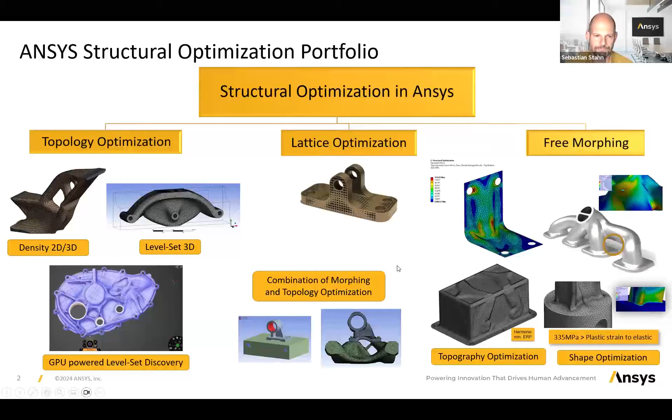We need several workflows for that. One is the design validation. Then we have the chain of optimizations where we're using different kinds of methods to get the best results. The most important and biggest pain point is STL to CAD solid parts.

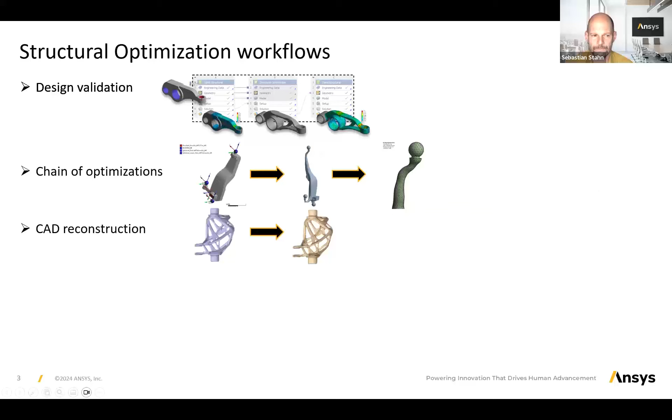And we need to check if we can really manufacture it. 3D printing is quite expensive, and we have a simulation suite for that, where we can check the positioning as well as the support structures to have the right printing time. Also, this kind of compensation of distorted geometries if needed.

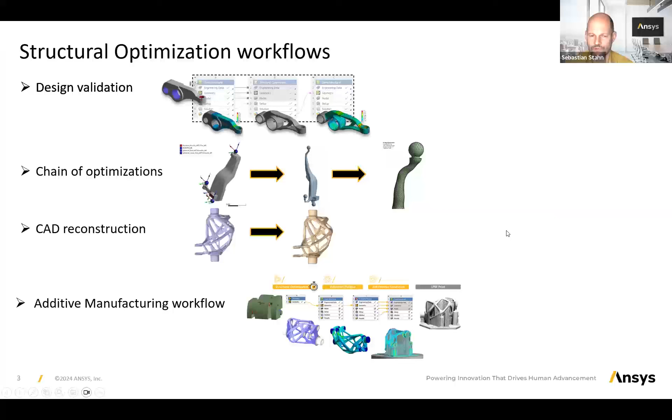Let's have a look at the first one. So this is how we are presenting our workflows. We have the structural analysis at the one part. Then this is feeding our topology, or let's name it structural optimization. You have the free choice, of course, what you want to use. So here we have topology optimization. And finally, we have design validation, where we check if all requirements are met.

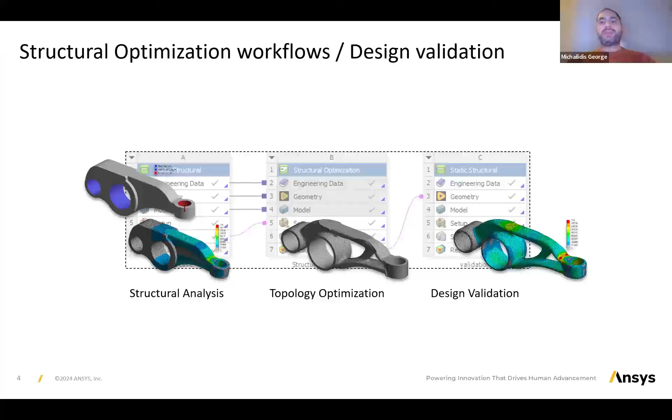Now, one may ask, why should I validate a design, since topology optimization performs an analysis at each iteration? First, let's mention that using density methods, it is inevitable that your design will contain some intermediate densities, since implementing projection methods based on some continuation approach that is frequently presented in literature is prohibitive in terms of time for industrials. Exporting a shape based on a density threshold is expected to have some impact on the values of the criteria serving either as objectives or as constraints.

This effect is significantly reduced, of course, using the level set method. However, even in this case, since a fixed mesh is used and combined with some sort of ersatz material approach for the exterior part of the shape, some criteria, such as the stress, for example, may be computed with reduced precision.

As you can imagine, a key ingredient for the success of this step is the smoothness of the optimized shape. The smoother the shape, the easier it is to reconstruct the mesh. However, smoothness introduces new challenges related, for example, to the rate of convergence, to the geometric details that finally appear in the optimized structure. For example, it's possible that the customer expects to see some thin ribs. And finally, there is a compromise to reach based mainly on the customer's experience.

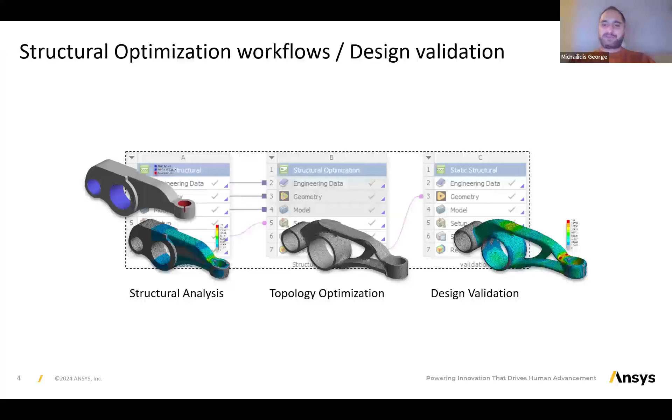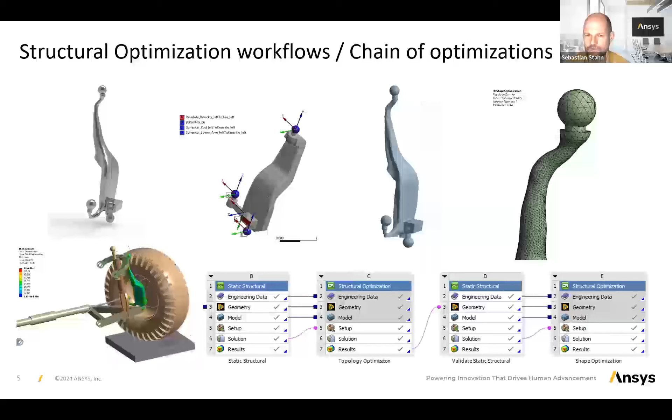And here the big question is: is it really working in a way it should? So in the next step, we're looking then at high loaded parts with a fatigue analysis, for instance, and this is then morphed with the free morphing technology to get a higher lifetime at the end. And so we can improve or reduce the stress by 43%.

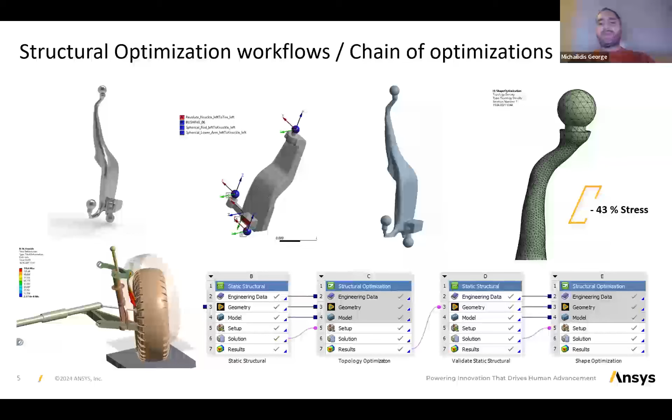Now, beyond the aforementioned challenges concerning the mesh reconstruction, we need to highlight an additional difficulty for this step. This is that with the exception of the level set method, which is of geometric nature, shape optimization uses different variational methods than density-based optimization. In order to make this workflow work, you need to cover a comparable range of criteria for both methods, which is quite challenging.

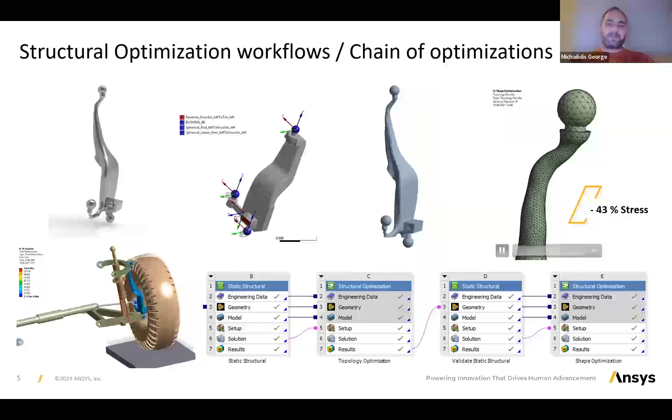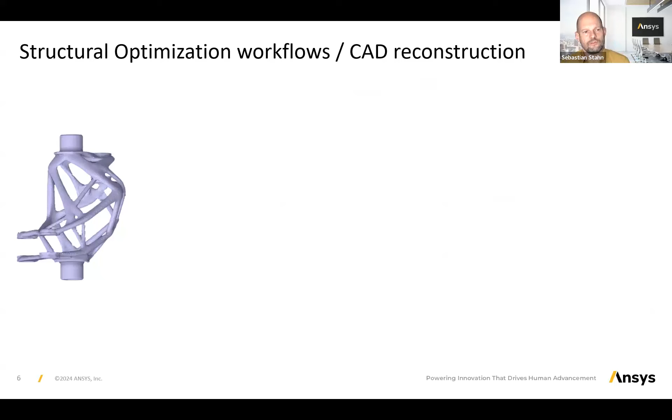Now comes the biggest pain point, I would say, for the industry. Imagine getting such a part back to CAD. This is really taking hours, sometimes in the past at least. So we have another concept: a tool which can create with one click this kind of part back into NURBS surfaces as a solid part.

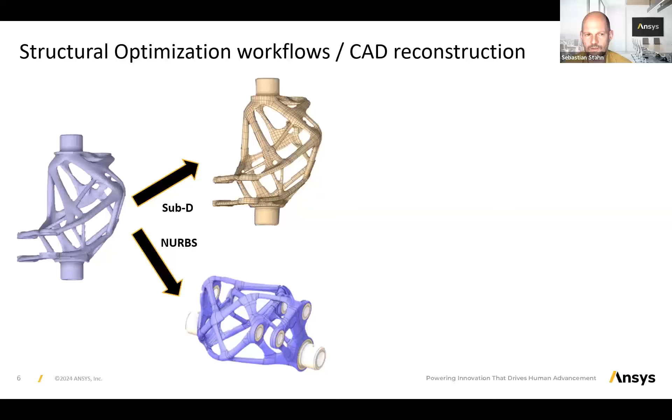And as we know that sometimes we need to change it a bit, we introduced the so-called subdivision modeling, where we are creating patches also with an automatic routine. And those patches we can then manipulate afterwards. We can add things. The boundaries are coming clear across. We can move on all kinds of surfaces to improve or to change something.

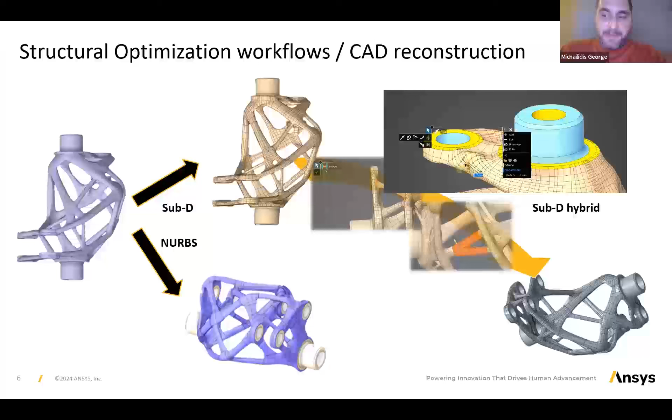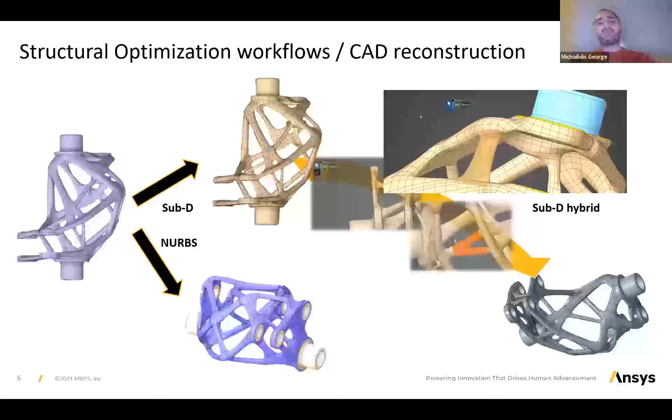Or even, if you can see it here, if there's some kind of a bridge needed for the post-processing, we can just add it. And that's it, that's the magic. And then finally, we can convert it back to CAD. Now, achieving robustness and precision in this process is also a difficult task that requires collaboration between optimization and CAD experts. In vague terms, we could say that bad geometry would require deviating significantly from the optimized boundary in order to create a proper CAD design, which can lead possibly to significant deviations in terms of performance.

Yeah, so let's have a look at the additive manufacturing workflow. As mentioned, it's important to have a simulation up front of the printing because it's expensive. And we need to look for orientations, strategies, scan strategies, support strategies, you name it. So we have everything connected and internally here for us, for the customers.

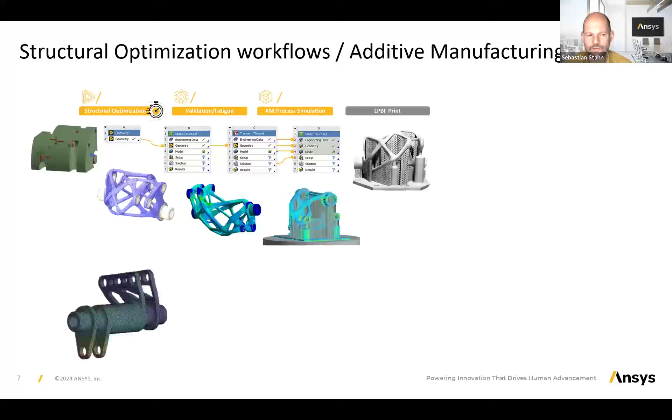And to give you an idea what was the challenge here, we faced that this kind of part, what we can see here, it's a really finally optimized part with milling. And the requirements were that this part weighs around 200 grams, should be even optimized even more. And then we get it down to 127 grams in titanium with our technology.

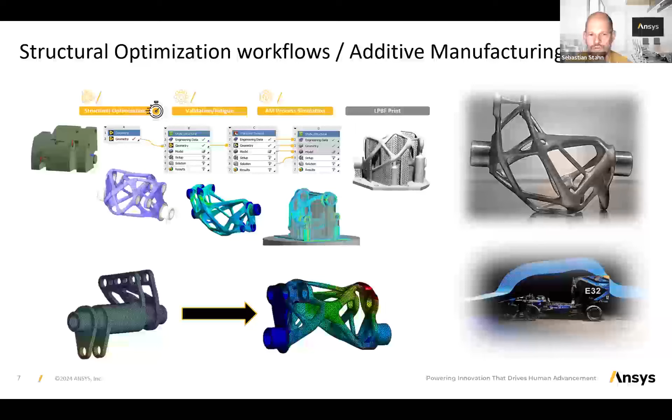We also have sponsors for that, which helps students print those parts as a kind of sponsoring package so that they can really take it and use it in their competition.

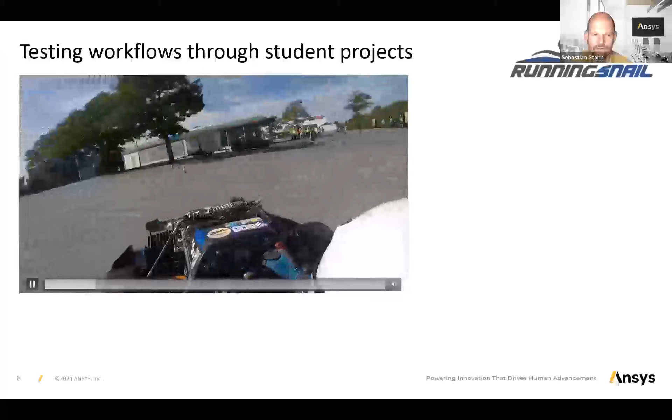And here you see it in action. They put it on the top left part, installed it, tested it, and it was also run in their racing series.

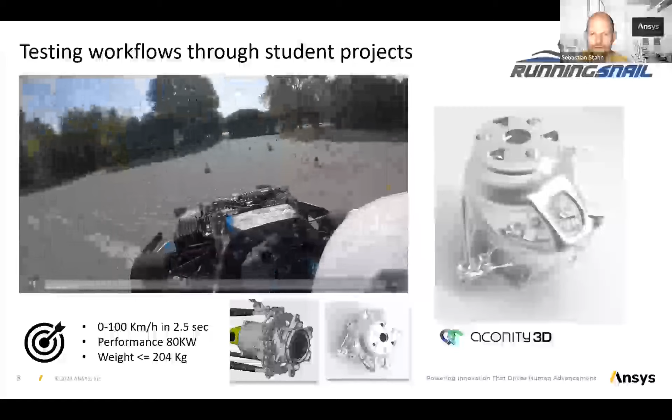Another part you can see: their electric motor is held by the part, along with the tire and the brakes. We did it also with the same approach of discovery at the end and getting it back to CAD.

The requirements were to have a car which is really lightweight, so 204 kilograms. I think they ended up at 180, if I got it right. I talked to them. The performance is always the same, and the speed is 2.5 seconds from 0 to 100 km/h - that's 0 to 60 mph in America.

So this completes a general overview of how structural optimization is implemented in Ansys and some general challenges related to the need for complete and efficient workflows.

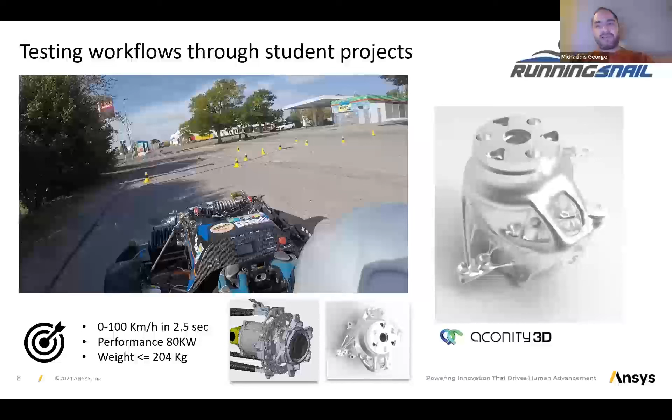Now let's focus on some functionalities that have proven to be important for industrials through our experience.

Let's start with manufacturing constraints, which, as you can imagine, is a crucial component for real-life applications of structural optimization. Beyond standard constraints frequently met in literature, such as casting direction constraints, overhang elimination, and feature size constraints that we provide to the user, there are also manufacturing constraints that derive from the functionality of the part.

Consider, for example, this clutch design, fixed at some regions shown in blue, where a force is exercised on the inner surface shown in red. Suppose one wants to minimize the compliance subject to a volume constraint.

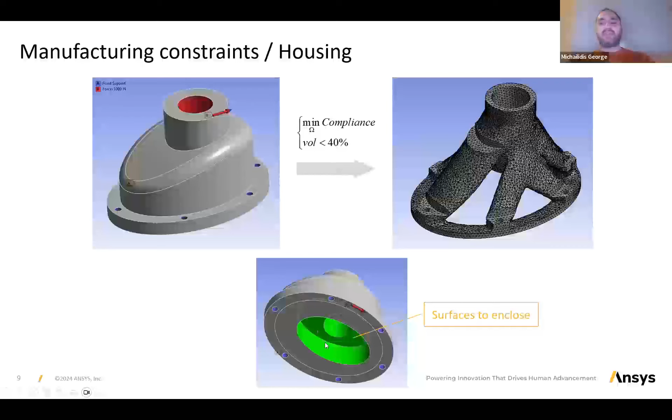If you perform topology optimization on this example, you will probably get some perforated design like the one shown here. But what if the region shown in green encloses some liquid? For this reason, we need a watertight design at the end that envelopes these surfaces. This is the role of the so-called housing constraint.

Adding a housing constraint to the optimization problem guarantees that the selected surfaces will be enclosed in the optimized design. It doesn't mean these surfaces are excluded from optimization - they are still optimizable. However, the optimized design must enclose them, as you can see in the new optimized shape we get after adding the housing constraint.

So this is the evolution of the shape. You see that there is no perforation. The initial surfaces shown in green are enclosed into the design.

This is different from the so-called no-hole constraint that exists in literature and is frequently combined with some casting direction and handled with additional controls. We have an in-house derivable formulation that is integrated into our optimization algorithms without any problem.

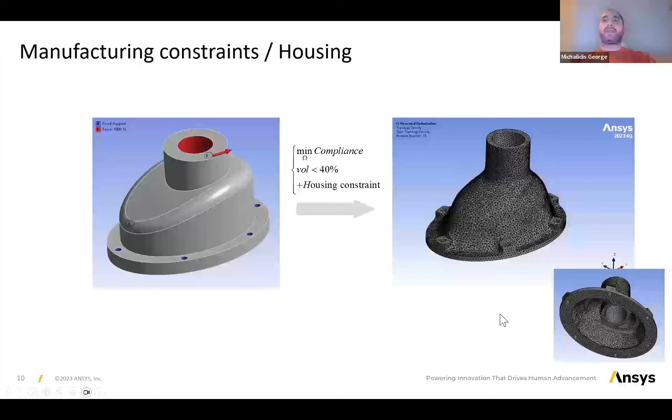Now, it's true that topology optimization allows for great design changes and significant gains, but it's still true that a lot of work on structural optimization in industry still concerns so-called shape optimization, where the connectivity of the shape remains unchanged. This is either because industrials may not want to add geometric complexity in some parts, usually coupled with increased cost, or just because they want to optimize some slight details. We have invested great effort to construct our own machinery for mesh morphing.

This can achieve significant mesh modifications while keeping proper mesh quality, as we can see in this example. Consider this part, which is fixed at some regions shown in blue, distributed cyclically, and where there is a remote imposed rotation at the top surface shown in yellow.

One searches to maximize the reaction force at the fixations - a sort of stiffness criterion, subject to a mass constraint. There are some regions here in red that are non-optimizable, and only the part in blue is allowed to move and be optimized. As you can see from the animation, our morpher can achieve significant shape changes while keeping a proper mesh.

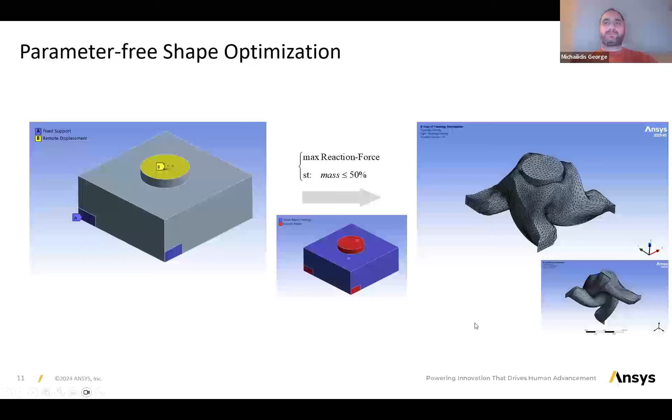This becomes even more challenging when adding design restrictions, which is a common need for industrial applications. One example is the so-called in-plane morphing restriction, which imposes an in-plane deformation for the selected surfaces.

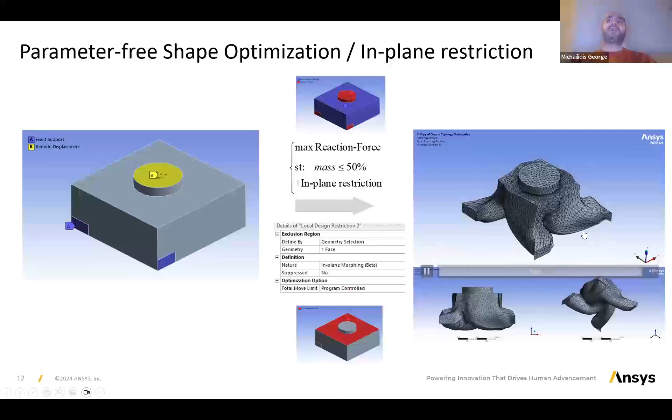Consider again the same example as before, and we will add the so-called in-plane restriction for the surface that appears here in red. That means this surface is allowed to move only in plane and not perpendicularly. You can see in the optimized result that this surface has remained planar throughout the optimization process. This surface just moves in the plane and not vertically, and still the morpher can achieve very significant shape modifications.

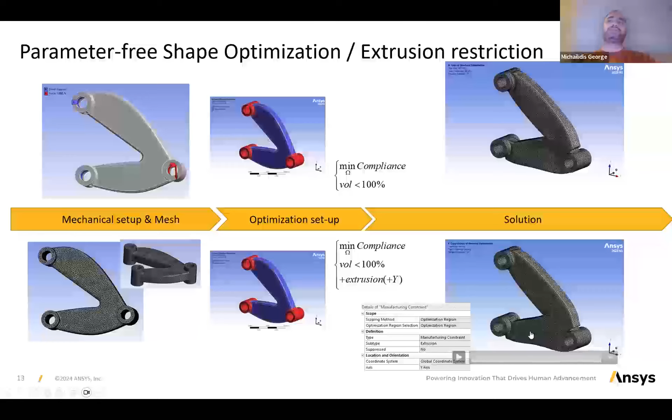Okay, Sebastian? Yeah. What is the next challenge here?

With the power of the GPU, we can then use a method called automatic mesh refinement. Many customers want to use this GPU solver for such examples in order to profit from accelerated finite element problem resolution. However, an optimizer contains more than just a solver, and for some of these parts, an analogous acceleration is very difficult to accomplish. In order to achieve better time rates, as Sebastian mentioned, we have explored and implemented by default an automatic mesh refinement technique that allows refining the mesh during the optimization until reaching the user-defined mesh fineness.

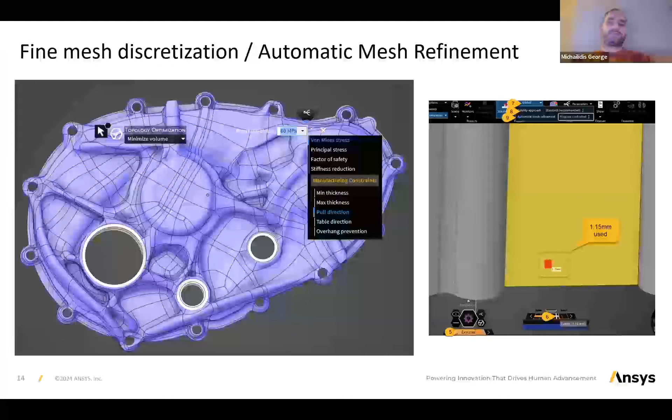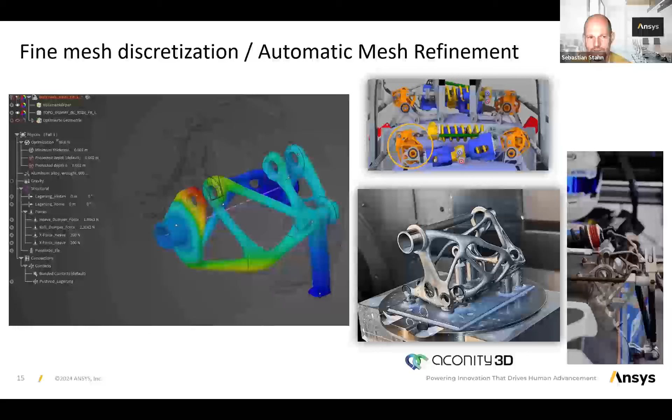Here we can see some application of this feature. The scene bell crank is run in our tool with the GPU driven solver, and it's doing as needed this mesh refinement to really get down to this really fine truss-like structure. And it's doing this in 5 minutes on a graphic card, and even fast at the end for this part.

You can convert it to STL. It's one click, and then you click on the faceted data, and you just convert it to sub-D. The script runs in the background, which gives us, with one click, this result.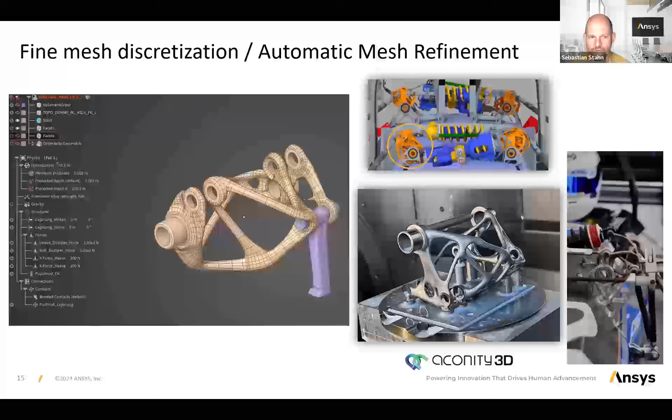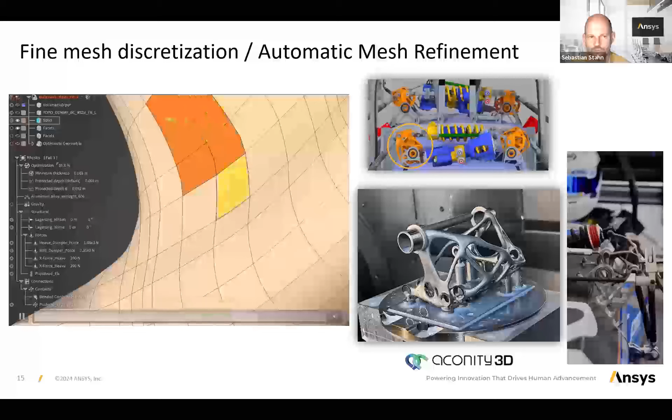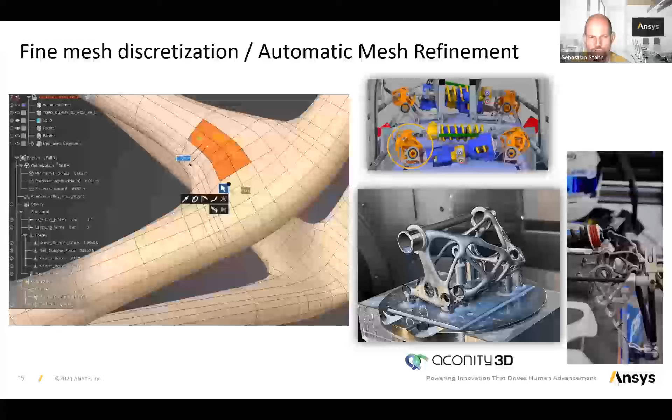And as seen at the beginning, we can also change or modify any kind of locations if needed. The part itself is transferring the power from the tires horizontally to the damping system, which we can see in the middle of the picture.

Now beyond the mesh discretization, the mechanical analysis can also be inherently time demanding. Consider, for example, harmonic analysis, which is frequently encountered when treating noise, vibration, or harshness problems. In this case, there is some part, like an engine, that vibrates, and we seek to optimize the performance determined by the solution of the vibration equation shown here. M is the mass matrix, C is the damping matrix, K is the stiffness matrix, and you have a harmonic loading here, with U being the displacement field.

For harmonic excitations like this, we are interested in the steady state part of the displacement, and we need to solve, for every excitation frequency omega, the discretized system shown here at the bottom. For typical industrial applications, these involve very large frequency intervals of the order of 200-300 Hertz, as well as fine discretizations to achieve the required precision. It is typical to have 100 or even more excitation frequencies to examine. Solving for each frequency, computing this discretized equation, and computing an adjoint state is prohibitively time-consuming.

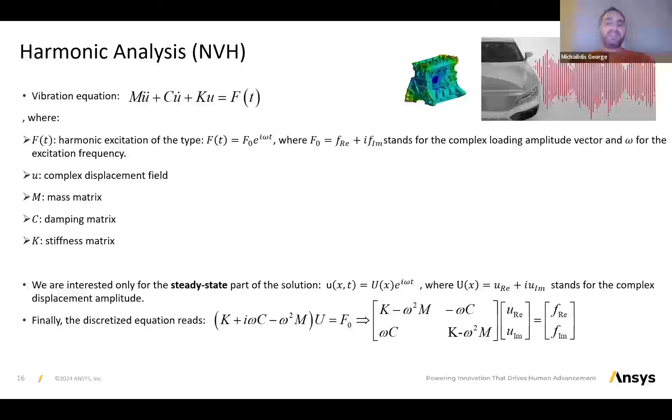For such cases, it is common practice to work using the modal superposition method. In short, what is done in this method is that we compute a reduced set of eigenvalues and eigenvectors, and then try to decompose the displacement on this reduced basis.

Now, if the damping matrix is diagonalizable, it is trivial to compute the coordinates in the new reduced modal basis. If you use this approach, instead of treating directly the displacement field, you must compute derivatives for the eigenvalues and eigenvectors of the reduced basis.

Beyond the difficulty that deriving eigenvectors can bring, which I will not detail in this presentation, it is common to find more than 10 modes inside the specified frequency interval, meaning you must compute a derivative for each of them at every iteration of the optimization process. This is not necessarily prohibitive as before, but it is still very time demanding.

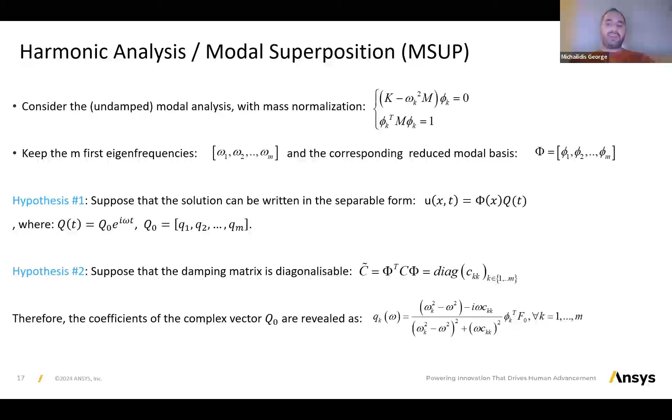And for this reason, we have developed efficient ways of approximating the adjoint states that lead to a significant reduction in terms of computational time, while keeping sufficient precision.

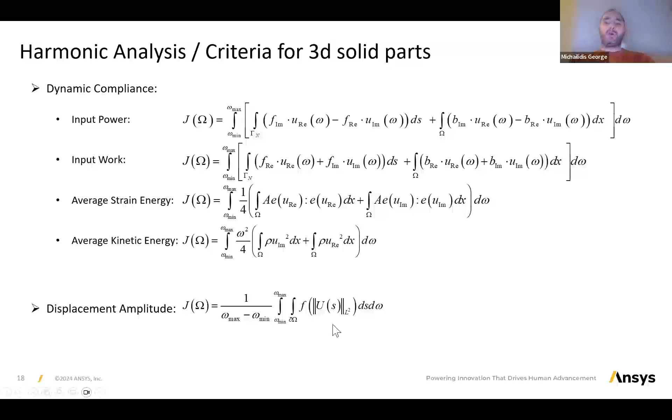These techniques are implemented for all the criteria related to harmonic analysis. For example, for 3D solid parts, we have 4 criteria related to the notion of dynamic compliance: input power, input work, average strain, and kinetic energy. We also give the user the possibility to build a composite criterion that depends on the displacement amplitude, using what we call a user-defined criterion.

Now let's explain this in short. This is a very practical way to build a formulation for some criterion following a sequence of choices and reductions. For example, the user can go to a harmonic response analysis, add a user-defined criterion, name it, for example, displacement, and then follow a sequence of choices.

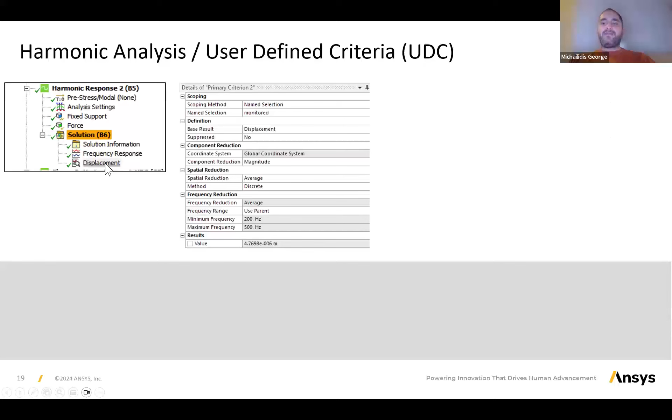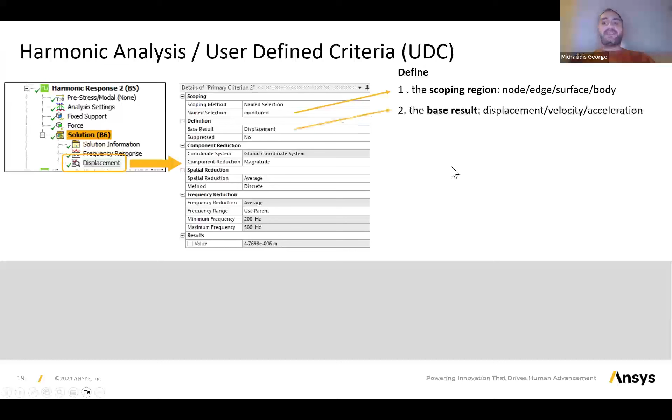Define the scoping, that is the region where the criterion is applied, a node, an edge, a surface, or a body. He can choose a base result between displacement, velocity, and acceleration for harmonic analysis, and then follow 3 successive reductions. First, a component reduction that transforms the base result into a real scalar field depending on location and frequency, for example, the X component of the displacement.

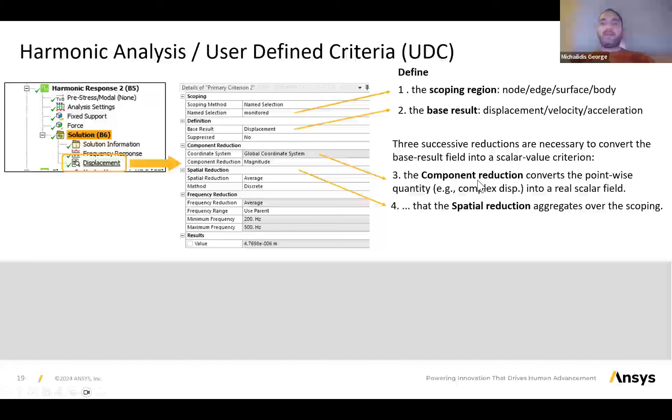Then a spatial reduction that transforms the previous field into a field depending solely on the frequency. And finally, a frequency reduction that returns a scalar value for our criterion.

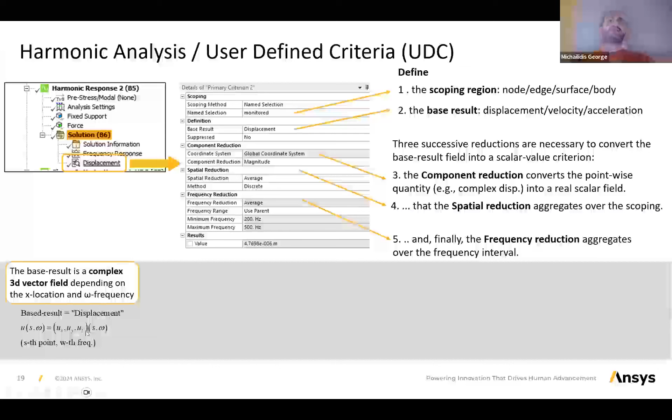So starting from a complex 3D vector field, which is the base result, we apply a component reduction and get a real scalar field that depends on the location and the frequency, for example, the amplitude of the displacement in the X direction.

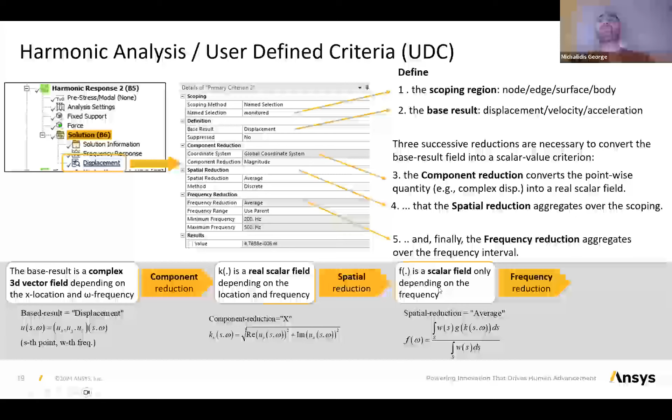Then we apply a spatial reduction, which transforms the field into a scalar field that depends only on the frequency. And finally, a frequency reduction that provides a scalar value. That's the logic of our user-defined criteria.

Let's see an example here. Consider the bracket shown, composed of about 500,000 linear tetrahedral elements. It is fixed at some regions shown in blue, and there are 3 forces applied at the regions shown in red. There is a large frequency interval from 4,000 to 9,000 Hertz, discretized into 200 intervals.

By default, Mechanical will consider all modes up to 2 times the maximum excitation frequency, meaning up to 18,000 Hertz. For the initial design, this corresponds to 15 modes, and we have checked that during the optimization, this number fluctuates between 15 and 20 modes for this example.

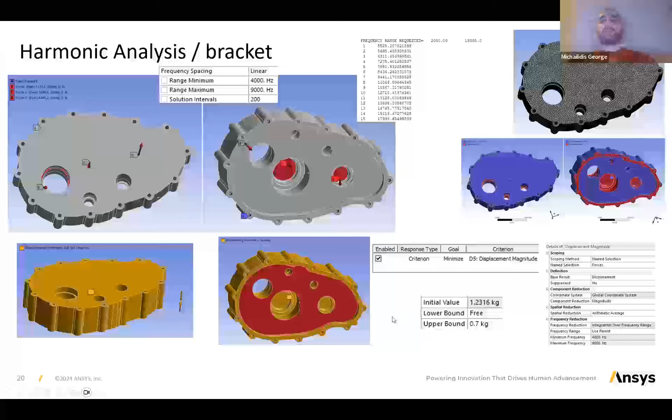So what we do here is apply some exclusion regions shown in red, with a pull-out direction and a housing constraint for this region in red. We search to minimize an average displacement criterion for the regions where the forces are applied, subject to a mass constraint. So it's a heavy problem.

And here is the optimized shape that we get after 57 iterations. You can see from the evolution that no perforation appears thanks to the housing constraint that protects the lower surface. The algorithm converges after approximately 5 hours using 6 cores, which is quite satisfying for this specific problem setting.

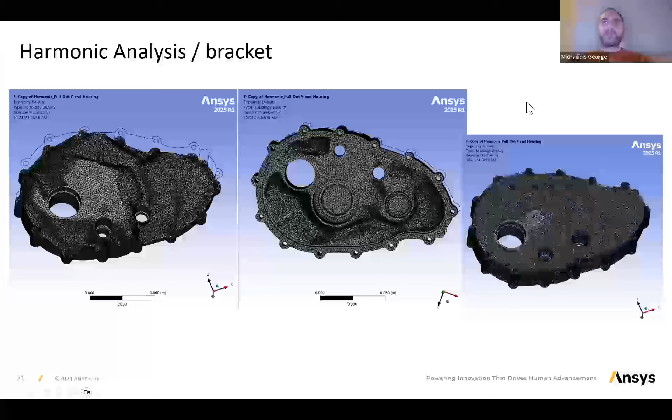For topography optimization, we also provide the possibility to optimize the so-called equivalent radiated power, ERP, which depends on the normal component of the velocity. This dependence adds an extra difficulty when deriving the criterion, since ERP may be defined over an optimizable surface, as you see here in blue, and then this exterior normal vector becomes also shape dependent.

So if you consider the optimization of this cap, which is clamped at some points in blue, and there is a force harmonic excitation on the regions in red, and you want to minimize the equivalent radiated power subject to some volume constraint, and you are only allowed to move this surface here in blue.

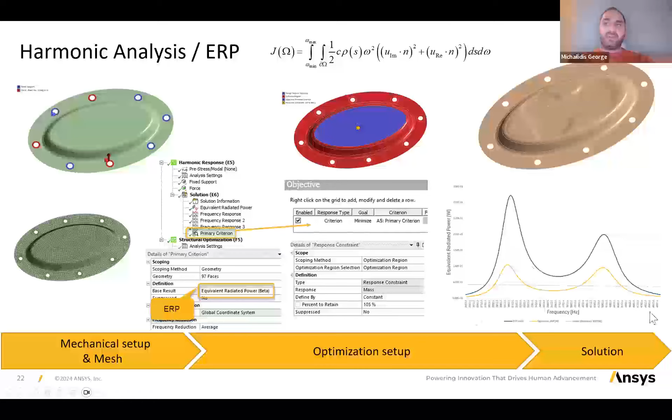You see here the optimized shape that we get, and you see how the equivalent radiated power reduces significantly. The black curve corresponds to the initial design, and the yellow curve corresponds to the optimized design. You see how this has been reduced significantly over the excitation frequency interval.

And this brings us to why not mixing it up? So here's a special case. The steel lug has a really small displacement allowed only. So just running topology optimization on the aluminum block would fail because the requirements from the steel are too high. So by using an optimization, we allow that the shape optimizer also at the same time can modify the steel lug, so that it's possible to optimize this complete problem, which is otherwise not realizable based on the constraints.

So you see here the evolution of the optimization. The lower part is optimized with topology optimization. The upper part is optimized with shape optimization. They are optimized simultaneously, and the difficulty here is principally technical and concerns the necessary adjustments for the efficiency of the optimizer. This example converges after just 30 iterations, which is just a few iterations for such a problem.

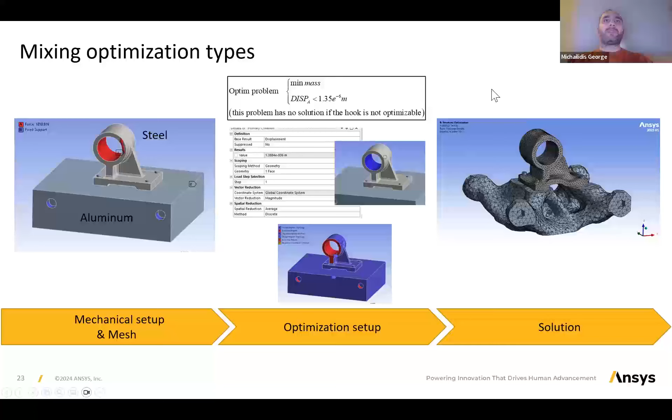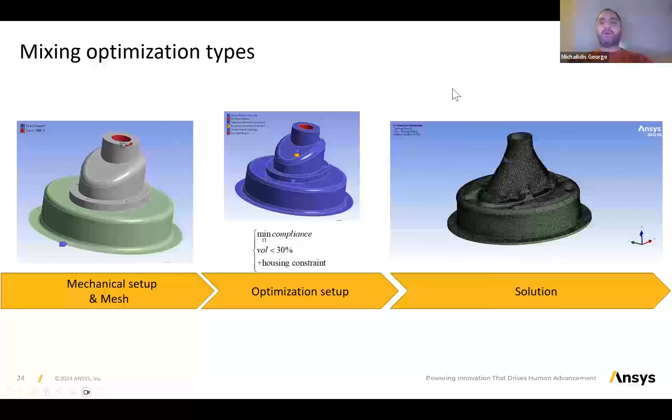And then let's revisit it and let's name it generative design. So as we stated, we need this kind of ribs for really having a lightweight design and to fulfill displacement constraints on the bottom of this kind of device, this cap.

And as it takes a long time normally, we have a tool in place with the GPU power as we have shown, and we can use it now to bring it to the cloud and run all 12 of them in the cloud in an hour, and we get it back, and we can also track it for kind of monitoring these displacement constraints. And this is really a game changer for the industry because they can explore a lot of things with a lot of power from the graphic card.

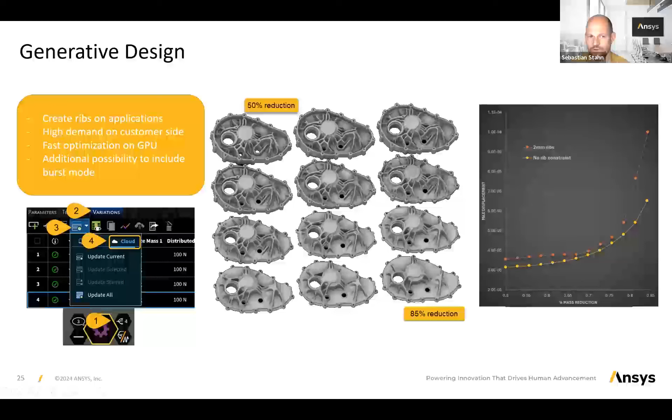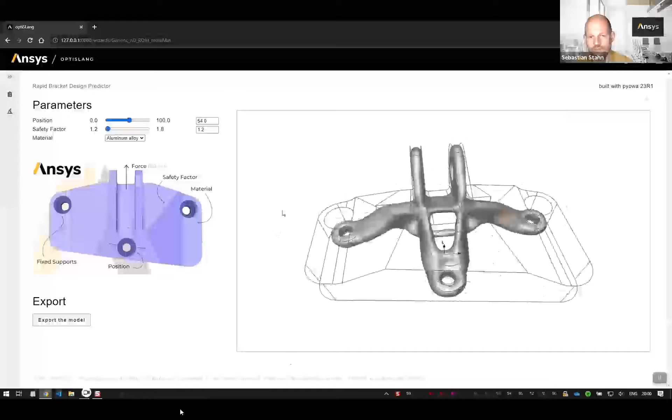And finally, speaking about machine learning, AI, whatever is the new name for that, you can run, as we have seen before, a lot of designs. Here is a bracket, it's well known, I think. And we ran, I think, 50 or 100 designs with different kinds of positioning of the fixtures, some safety factor which should be addressed, and different materials. So we can think about what-if studies.

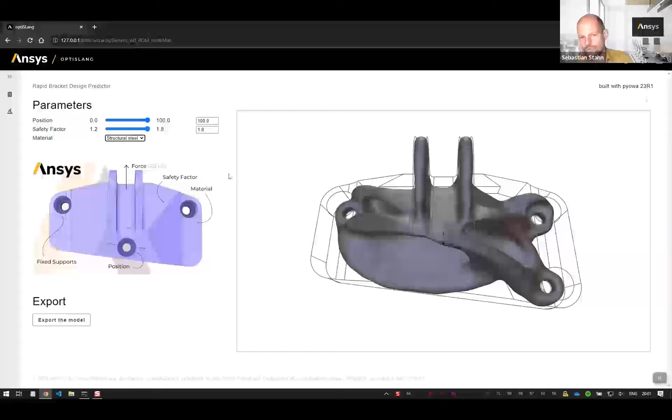And what you can see here is real time. So we're feeding a reduced order model at the end, and this reduced order model gives us all kinds of possibilities based on a few calculations. And this is our generative design by intention. We can tune in what we need and we get a response immediately.